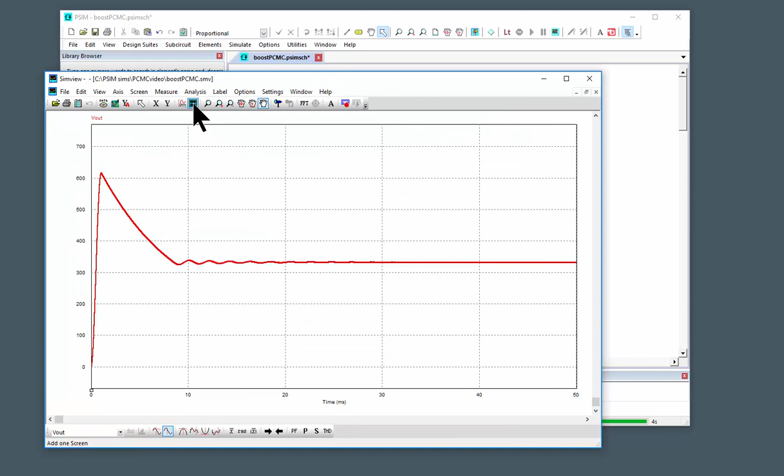We're going to go from 100 volts to about 300 volts over here, and we will basically run a simulation here in open loop to kind of figure out what we're dealing with. So the things that we're interested in looking at is making sure we're getting to around 300 volts here. I don't really care how precise this is at this moment. We'll implement a controller and that'll deal with that a little bit later on, as long as we're in the neighborhood. Look at the current through the inductor. Also, we'll pull up the current through the MOSFET. And those are the things that we are interested in.

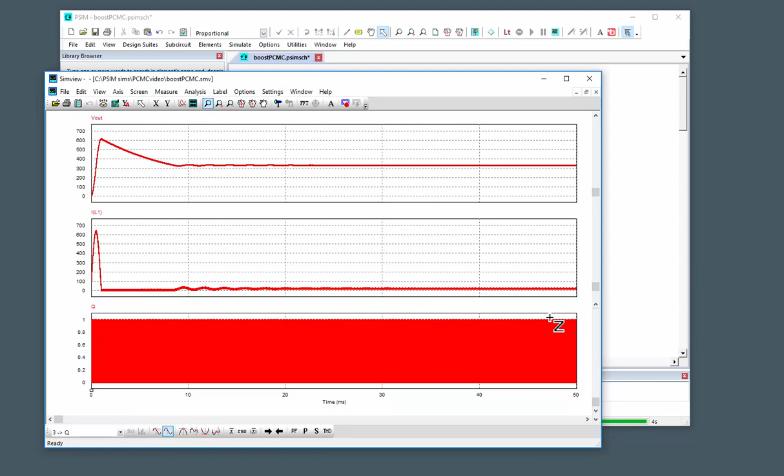Let's kind of zoom in over at steady state here, see what we've got. We just need a few cycles. Oh, this is just the switching. We need also the current through the MOSFET. Okay, so we're going to do peak current mode control. So we want to basically turn the switch off whenever we hit the peak current. We're going to be switching at 100 kilohertz, so the switching speed will remain the same. We can see we've got about 15 amps of ripple on the inductor here.

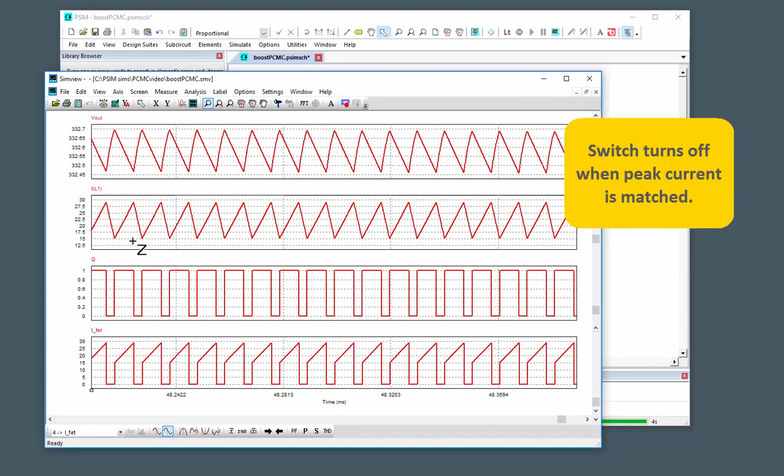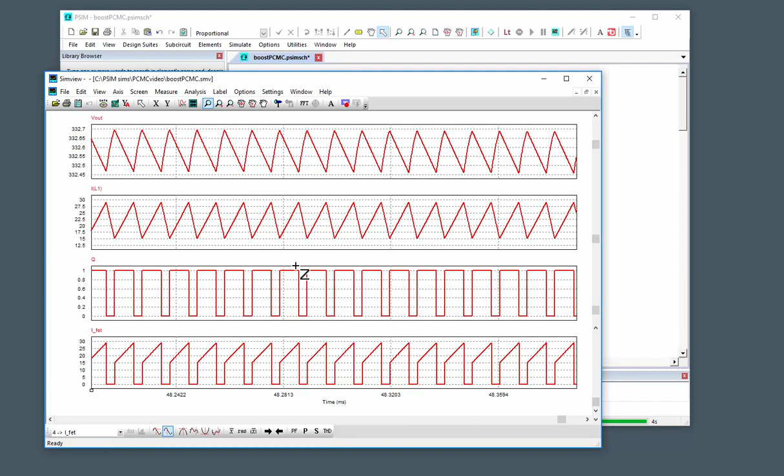We've got the current flowing through the MOSFET down here, and we can see that the inductor and MOSFET rising edges are the same. So what we're going to be doing is actually controlling the current and sensing the current on the MOSFET, and then using that for our control scheme. And then we'll do an outer voltage loop as well.

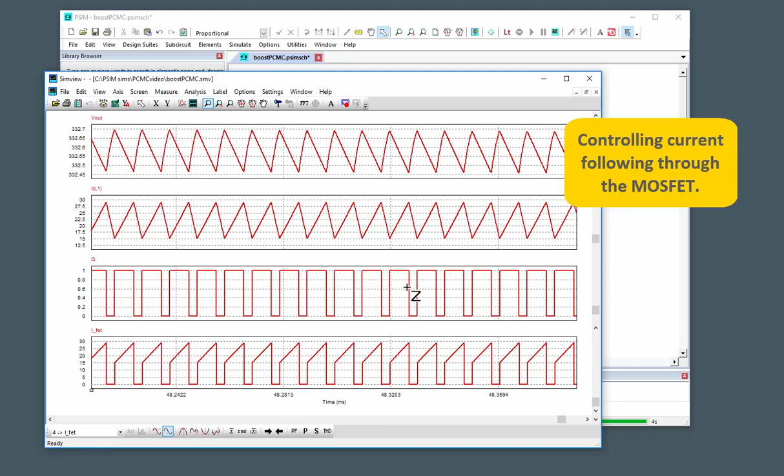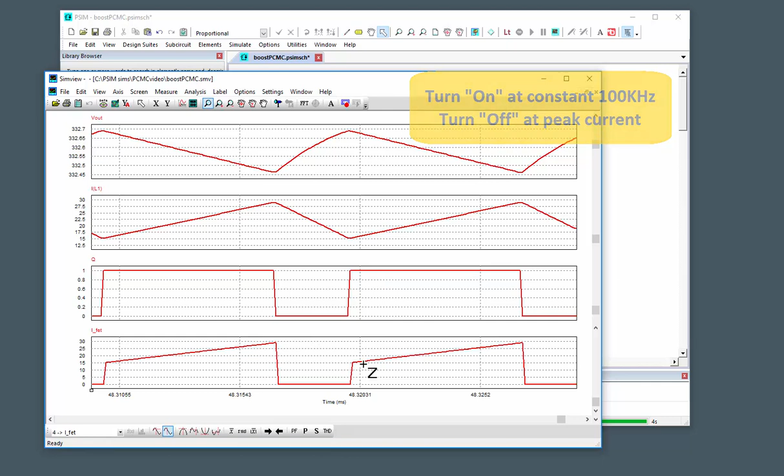So what we need to do is we need to turn the switch on and then turn it off. We'll just zoom on one cycle just to really hammer this point home. So we want to turn the switch on, and then we want to turn it off when we hit our peak current. Once we hit the peak current, we want to switch that thing off, and then basically switch back on again at the 100K point. So this off switching point will be variable. This on point will be constant. And then that'll kind of get us where we need to go. So first things first, let's set up that

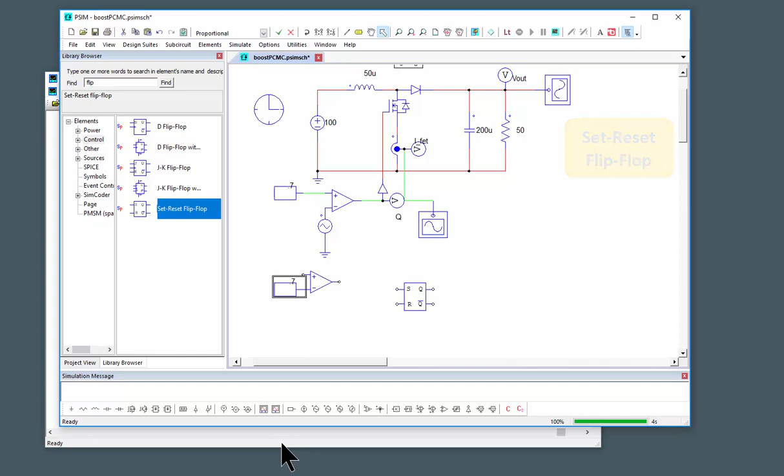peak current mode control. So to do that, we're going to need to grab a flip-flop. We'll grab the set reset flip-flop down here. We're going to grab a comparator. We're going to compare versus a reference. We're going to go to 30 amps here, so we'll change this to 30 amps. Previously, this was just driving a constant duty cycle of 70%. We need the current here, IFET. We'll pull this over.

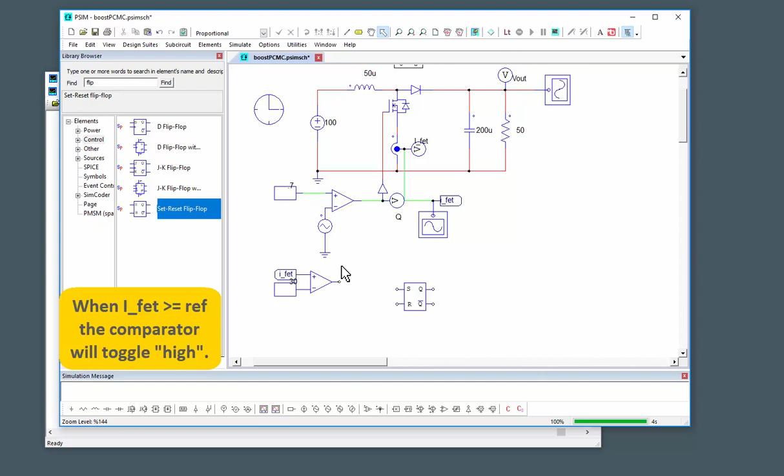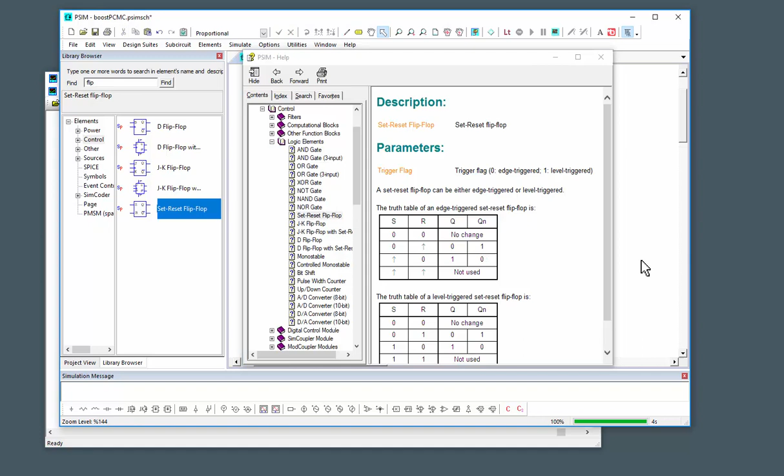Okay, so what this is going to do is once IFET is equal to or greater than the negative input, this will toggle high. So we'll look at help here. We'll go with edge triggered, so that's option 0. And so once it toggles high, we want it to switch off. So if we use this set option here as the input, if we toggle high, we want it to switch off, which means if we use the QN here, the negative output, we'll get the action we want. So we can reset it and toggle it high, and then we can set it and toggle it low. So let's set that up.

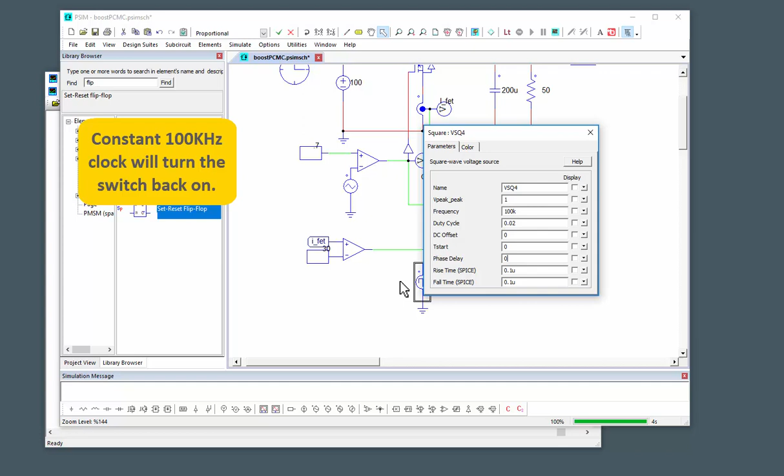Okay, so we're going to use the negative action here, wire that in, and we're going to set this, and then we're going to reset it at our 100K time period. We're going to go to 100K. We need to drive a relatively small duty cycle here because that'll drive our minimum possible duty cycle. And this is essentially everything we need to do here. Okay, so we've got our peak current mode control action set up here. So this will toggle the reset for us. And let's run this and see what happens.

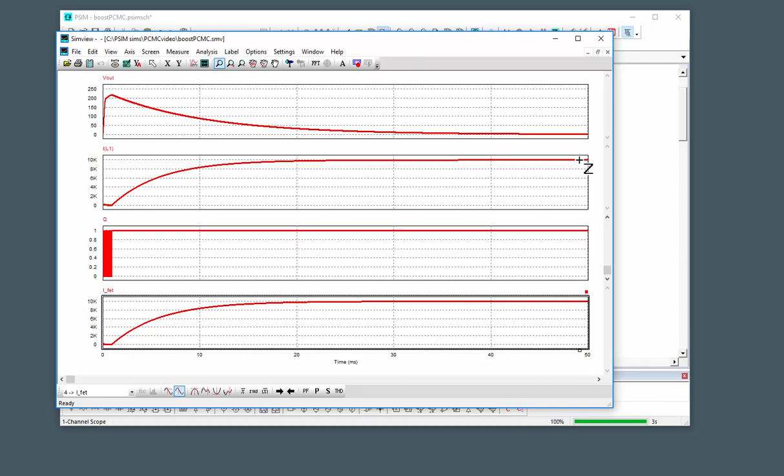And if you're familiar with peak current mode control, you might already know what's going to happen. And it looks like this isn't going to work. Our voltage has collapsed. Our current is a short circuit, so this is 10,000 amps. Nothing is working properly.

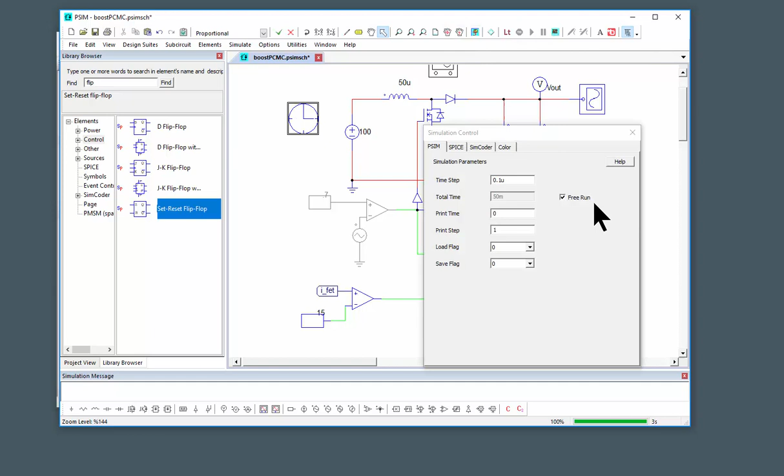So to kind of understand what's happening, let's put this into free run mode, and let's drop this peak reference down a little bit. Let me try and just move that here. We'll change this to 15, and we'll ramp up the peak reference, and then we can kind of look at what's happening. So this is going to be our free run mode, which is kind of like a test bench setup. So we can run this, and we can take a little peek here at the currents, and hopefully I can see the issue. Okay.

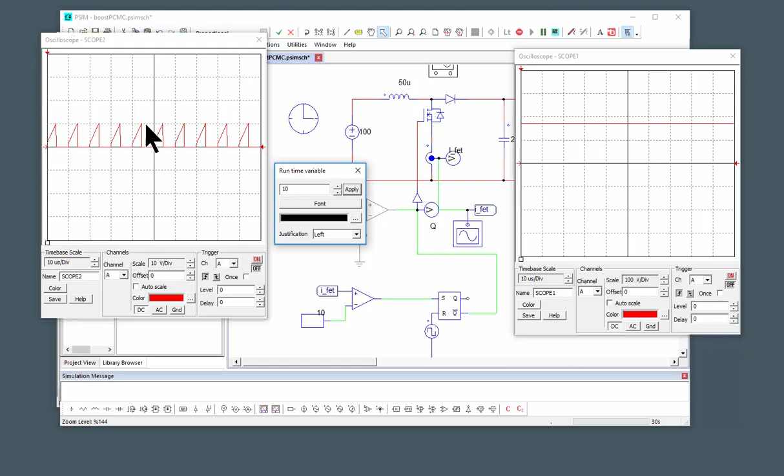So I've changed it to 10 amps here. Let's have a look at what the output voltage here is: just under 100 volts per division, so just under 200 volts. The peak reference is 10 amps. So this one is the current through the FET, and this one is the, let's just zoom in a little bit, and this one is the output voltage.

I'll AC couple this and auto scale it so that we can have a look at the ripple on the DC bus there. So what we're going to do is slowly increase the peak reference here. So there's 11 amps, 12 amps, 13 amps, 14 amps, and we can see, let me just put a trigger on here.

We're running into issues. So this is sub-harmonic oscillation. And this happens in peak current mode control when we start to get to duty cycles above 50%. And so that's why our converter didn't work right away when we set that peak reference up at 30, because we can't actually control it at that point. We need to modify the circuit to accomplish that.

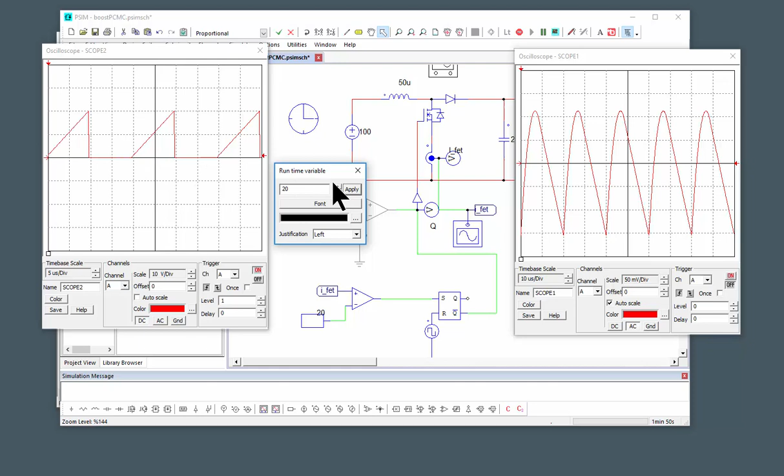So as we go up in reference here, we can see this short double pulse thing and this extra wiggle waggle, I'll call it, technical terms here, in the DC bus voltage. As we keep on going up, we can see that this merged over, and now we're switching at 50 kilohertz. If we keep going here, we'll just end up at a short circuit. So that's what happened. So let me just stop the simulation.

Now, what are we going to do? So the proposed solution, the known solution, is to actually add a bit of slope compensation to the reference here. I'm not going to get into the technical details of why. You can read up on that yourself. Okay, so we're going to introduce a slope into here, and that is going to be set up this way. So we're going to set up a sawtooth waveform.

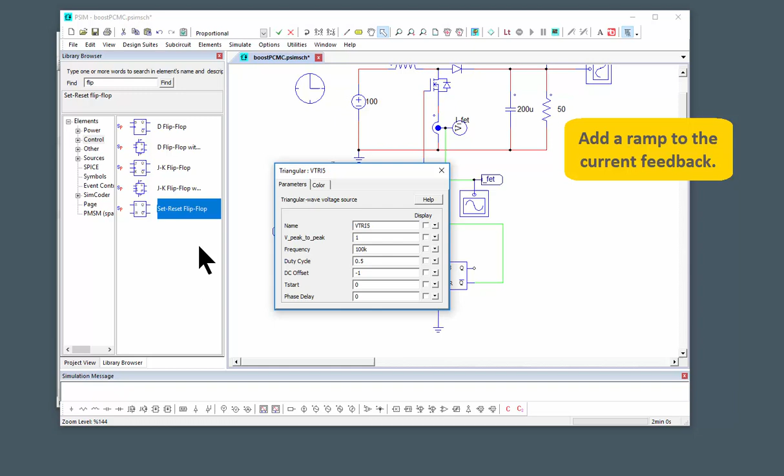And it's going to basically help stabilize the peak reference and let it return to its proper value at the end of each cycle. So this is going to be a sawtooth waveform. This amplitude, what is this going to be? That's the main question. We're adding a sawtooth at 100K. What should that amplitude be? Well, let's just disable this quickly. Okay, so we'll run this back in open loop with just a fixed duty cycle, and we'll have a little look at what we're dealing with here.

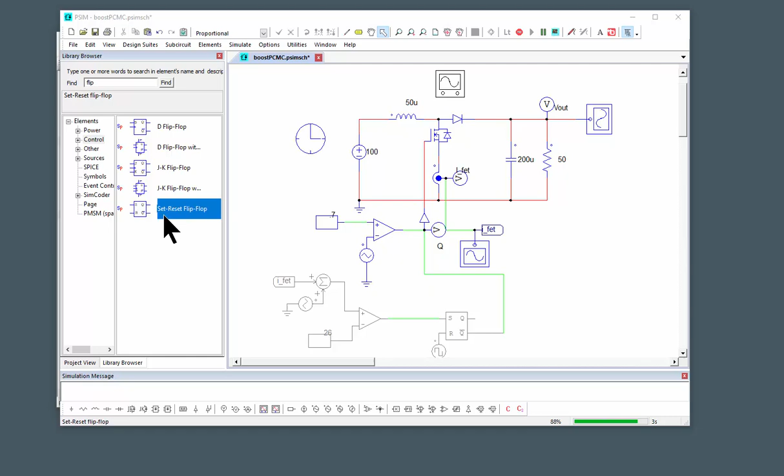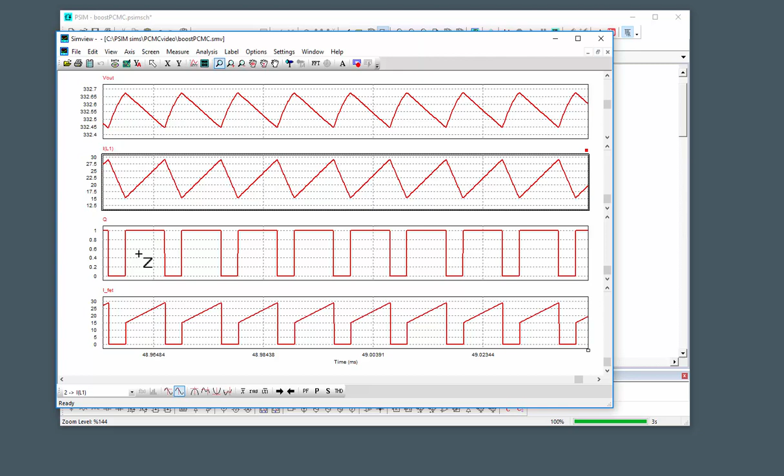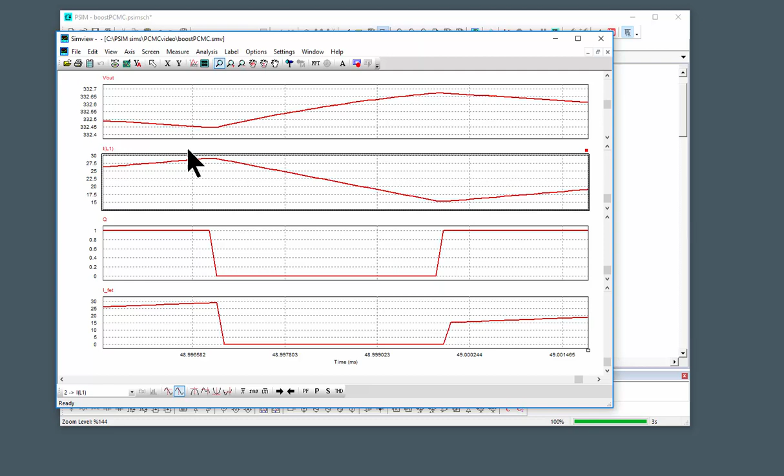Okay, so I'll go back out to steady state. So what we care about is the slopes of the current. And what we need to do, actually, is add in a slope that has the same slope as the downslope here on the current, on the inductor there. So we're going to add this in. And to do that, we'll just measure this. So we'll just grab just before and just after here, and I'll just move that right there.

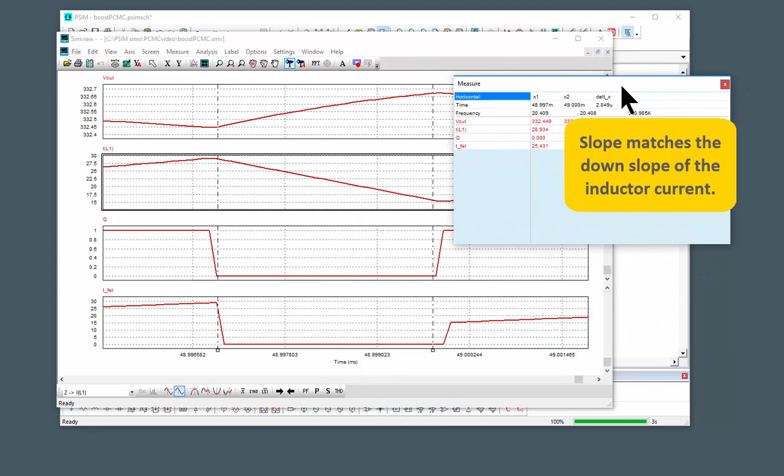Let me pull up the calculator. So we've got our cursors measuring the fall here, and we're going to look at the delta. So the delta on the current is 13.265, and the fall time is 2.849 micro. So that's the slope. And we're going to add that slope in over a 100 kilohertz period, and so that's going to be 10 microseconds.

So we'll add that in. And this is the number that we need to add in. It doesn't have to be a huge number of sig figs there, so 46.56 is going to be good enough. Come over here, and we're going to put that in. Oh, no, that was going to be 1. This is the wrong one. We want to put it over here.

There we go, 46.56. Let's disable this guy again, enable this, all these bits up, and hopefully we should be able to get to a peak reference that allows us to drive past that subharmonic oscillation and give us our 300 volts on the output here. So let's run it again.

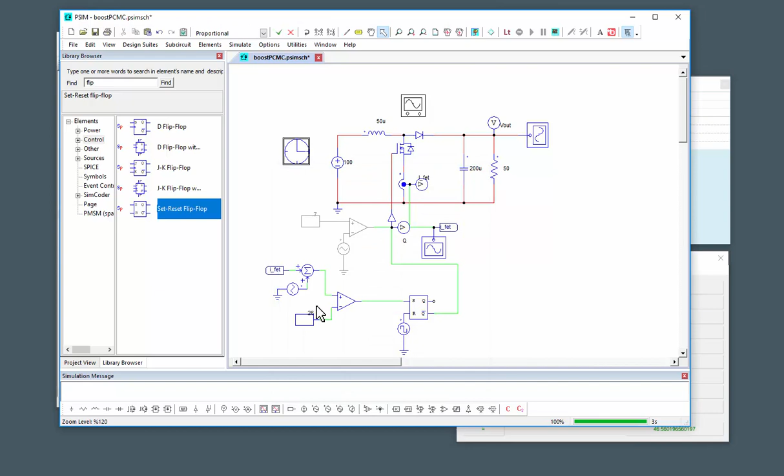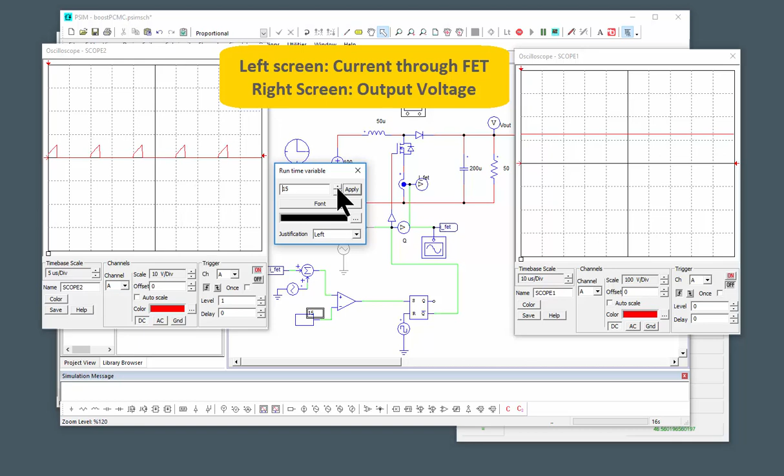So we were having issues previously, and we'll start from that lower value. I think it was 10 amps the first time. We'll run again here, pull up the current. So we're stable. Let's put this back onto DC. So we want to get to 300 volts on the output. So we'll just increase the reference here until we get to 300.

Okay, so we've got our 300 volts, and there's lots of headroom here with regards to current. We just need to be aware of what the limit is for our slope compensation that we've added. And so if we zoom back up again and wait for it to go into sub-harmonic oscillation again. Up. Let's see where it kicks out. It was right around here. There it was.

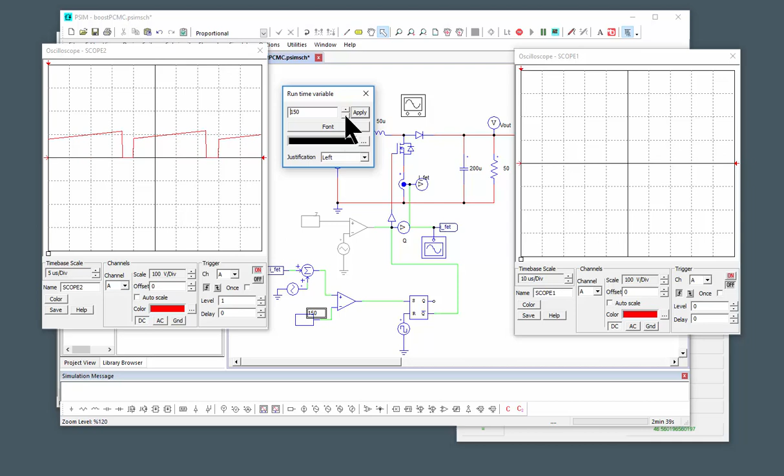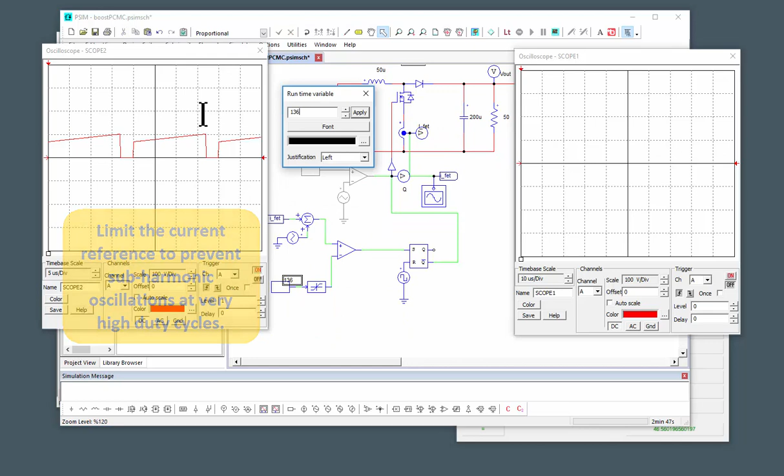Okay, it's stable there. So basically what might be a good idea is to put in a limit before we forget and say, okay, we're not going to go any higher than 130. Let's push this back to 50, 55. Let's rerun. Close these out, and we should be nice and stable now, and we are.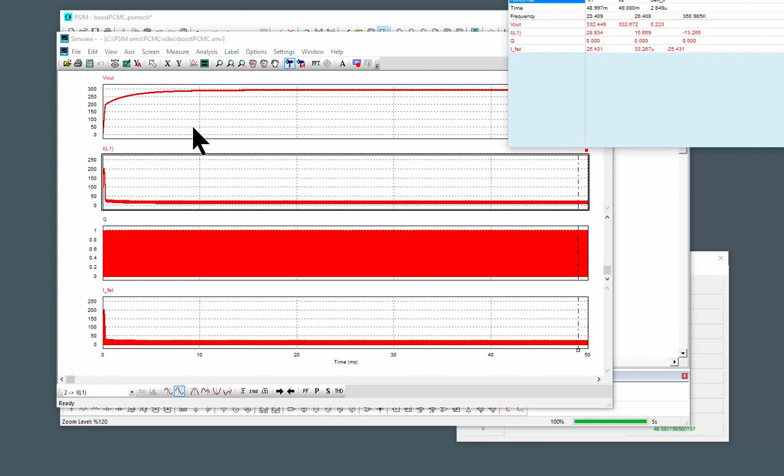Okay, so we got to 300 volts on the DC bus, and what we're going to do now is close the loop. The nice thing with PSIM now is we're going to be able to introduce a perturbation into the current reference and pick up the action over here on the DC bus voltage. So just to kind of give you a preview of what that will look like, we'll add this in.

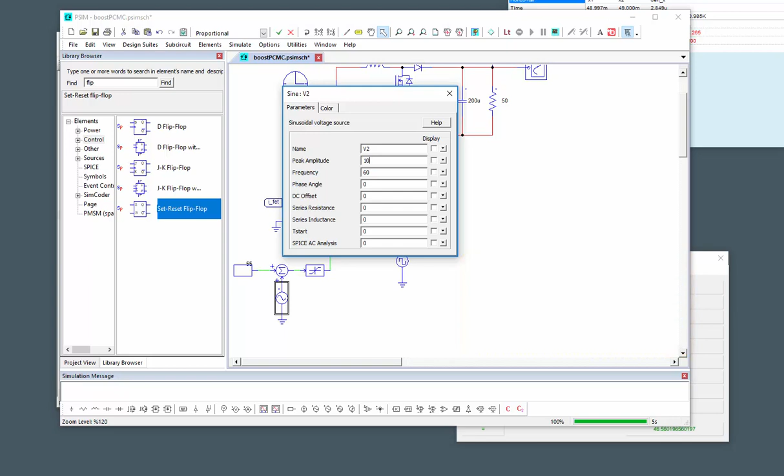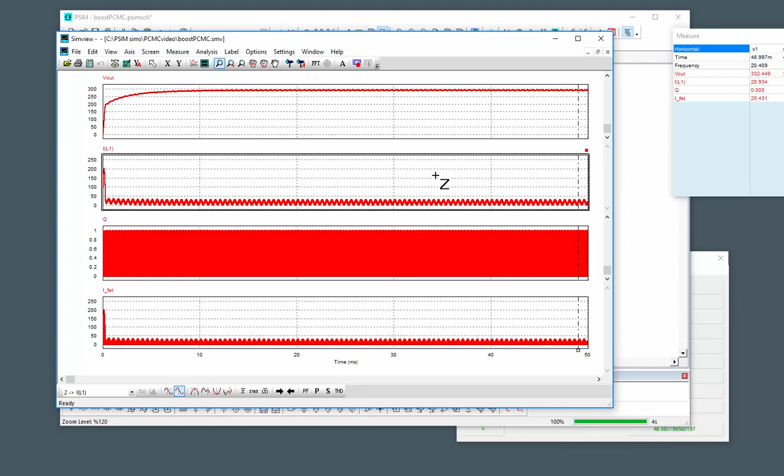So let's push a perturbation in here. Let's do 10. Do this at, say, 2K. And run this simulation again. You can see there's a little ripple there. You can see there's a ripple here on the current. Let's just quickly zoom in here. So you can see we've got, we'll scale this up.

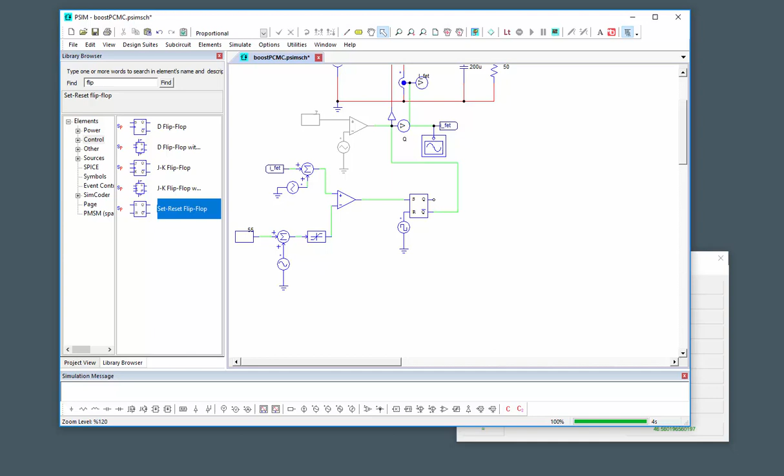So I've introduced a ripple at 2K. And if we look at what's happening, we can see that we've got peak to peak. So there's our 2K ripple. And what PSIM is going to do is a time domain simulation. It's going to inject those frequencies, and then we're going to do a phase and gain comparison at the DC bus voltage level. And then we're going to use that as our open loop transfer function, and we will close the loop. So we'll come back when I've got all that set up.

Okay, I've got the AC sweep set up down on the bottom here, and I've got our AC sweep probe set up over here. The settings I'm using, 20 milli for steady state time. So this was based on how long this converter needed to hit steady state. A source amplitude of 10. So when we look at the Bode plot, we'll see that there's quite a bit of attenuation and not all that much gain in the open loop system. So that's why we've got this set up here.

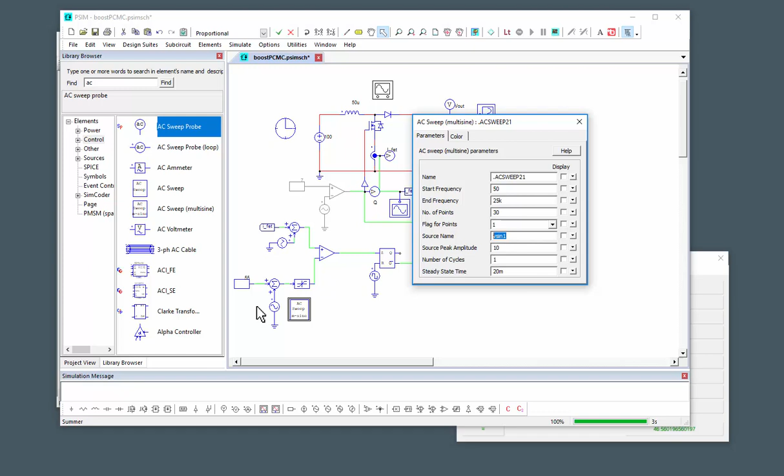Essentially, we need a little bit more signal in order to measure what's happening, and then I'm going from 50 to 25 kilohertz with 30 points. And we're VSin 1, so we're controlling this source right here. These numbers won't mean anything during the AC sweep. And so we're doing a comparison of a perturbation in the current reference versus the output voltage. So we'll run this and see what happens.

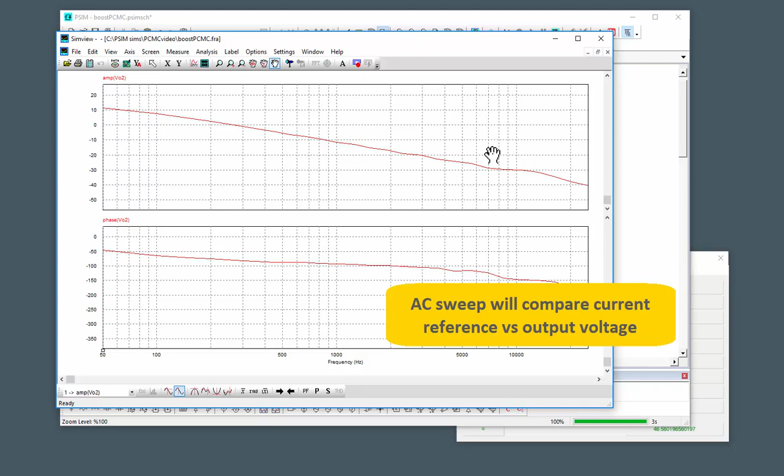So here's our Bode plot, and as I said, there's quite a bit of attenuation in the system, so that's why I ended up with a larger perturbation amplitude. And what we're going to do now is bring this into SmartCtrl.

Okay, so in SmartCtrl, I'm going to click Import a Frequency Response. We'll do Voltage Mode Control, hit OK. 100K, we're going to do 300 volts on the output. We'll grab that file, boost PCMC.FRA, hit open, hit OK. This other window pops up, sensor. I like to set my references to 1. So we'll go from 300 volts, and that'll be a reference of 1. So we need an attenuation of our voltage sensor of 3.33 milli.

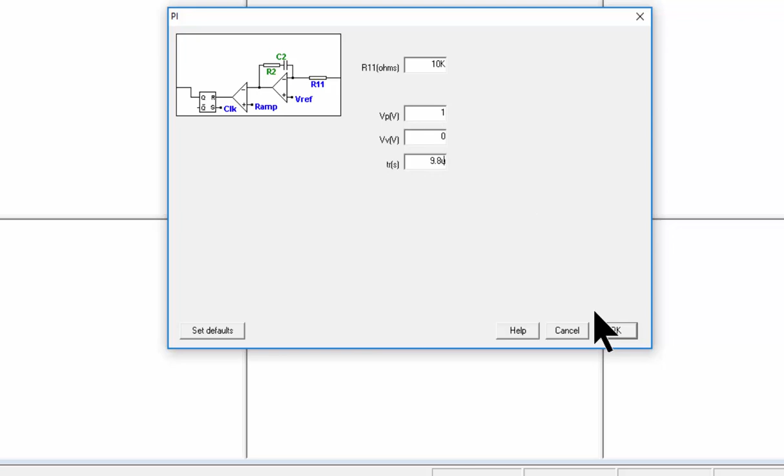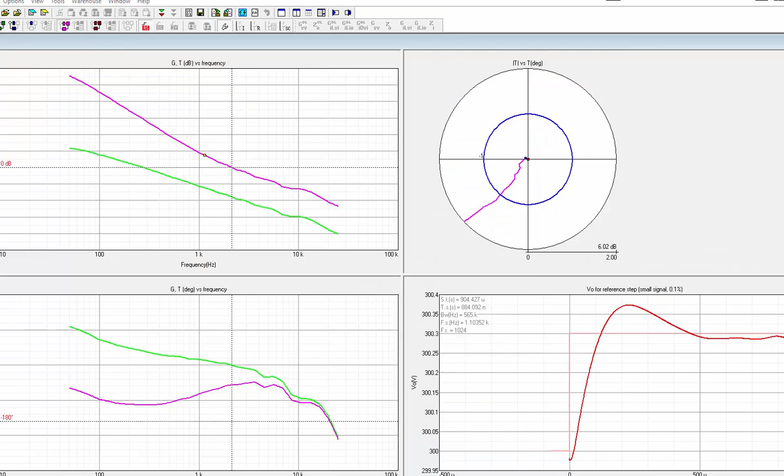And then a compensator, we'll just do a PI. We could do a type 2 if you were keen, but we'll just do this. So what I'm setting up here is basically a 0 to 100% reference. So everything's going to be per unit. This is defining a sawtooth waveform, just a simple ramp from 0 to 100%. If you start putting in different numbers here, you're going to start getting different gains into the system, which can be difficult to hunt down. And then we'll hit set. And then we'll just pick an operating point. And then we're off to the races.

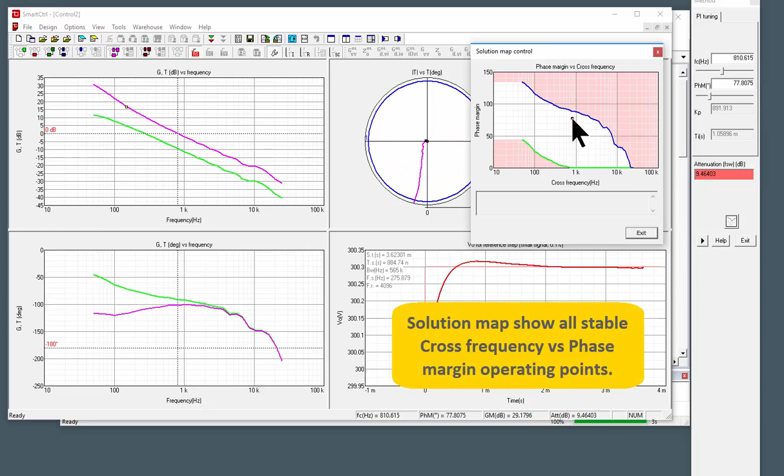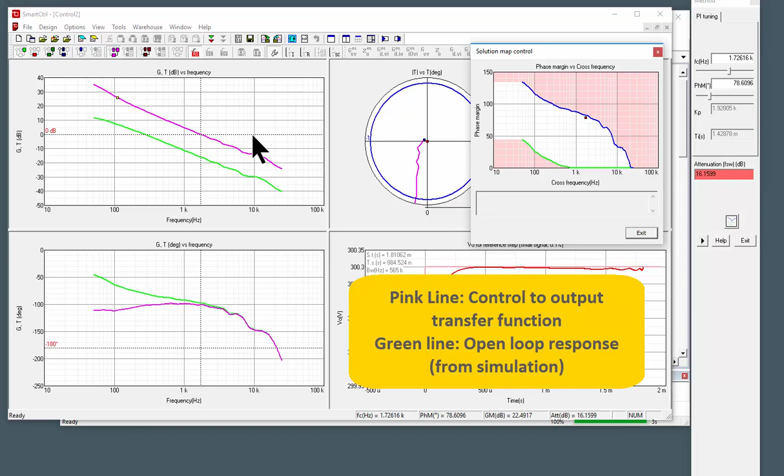Okay, so this is SmartCtrl. This little red dot is my operating point. So if I cruise this around in here, we can find a stable operating point. So say we don't want much overshoot. We can give ourselves a decent amount of phase margin. Cross frequency, say like 2K, something like that. Green line is the open loop transfer function. That's what we just generated from PSIM.

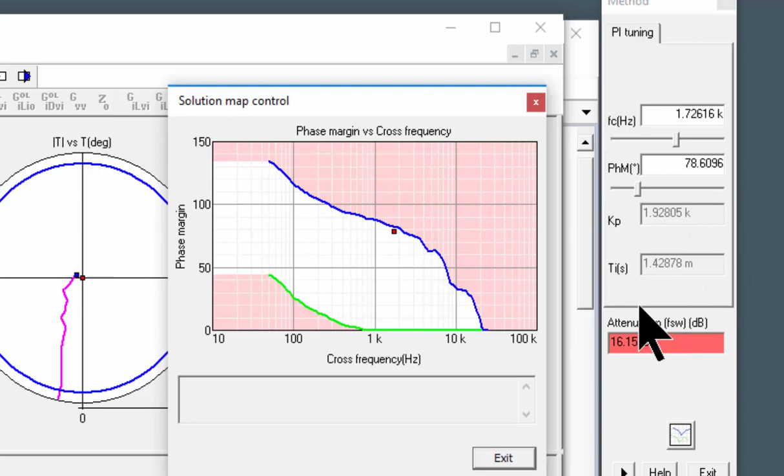The pink line is our loop gain transfer function. So this would give us our gain at DC, our cross frequency, and our phase margin. And this looks to be pretty good. So these are the numbers we're going to use here for our PI controller. These are the numbers we're going to bring over into PSIM.

Okay, so let's grab a PI controller. Let's grab a difference block. Let's grab IFET again. Oh, we need the output voltage this time, so we'll set up a sensor.

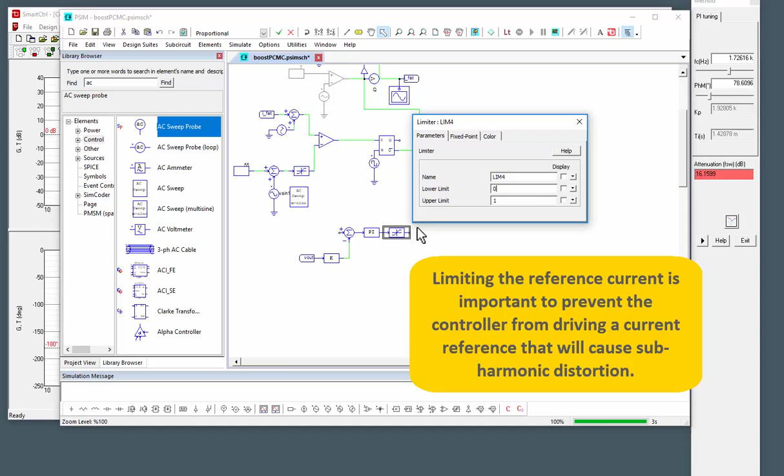Label that V out. Down here, don't forget our gain. So this is the sensor gain that we had, so 1 over 300. Wire this in. We should set up a limiter as well. So this is 130. 0 to 130. And a reference of 1.

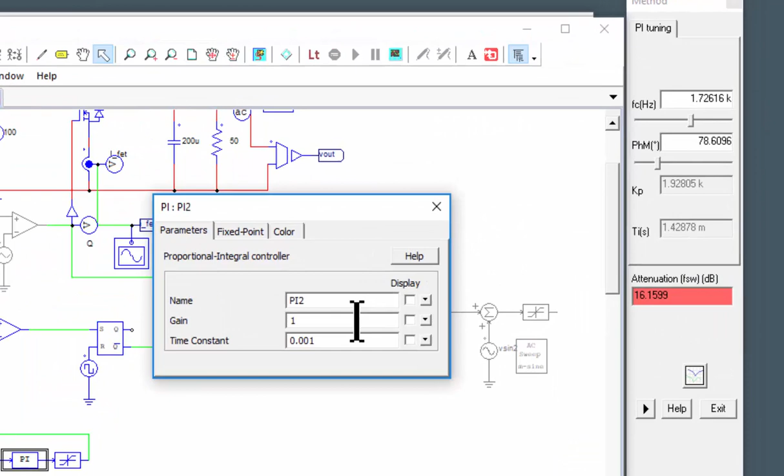Wire that in. And then, yeah, this needs to come over here. So we'll disable all this stuff. Actually, I'll just cut this out and put it over here. Move this, slide this up. 130, and these values are from here. So this is going to be 1.928K, and then the next one is 1.42878 milli. Hit OK, and we should hopefully be good to go, unless I've missed something.

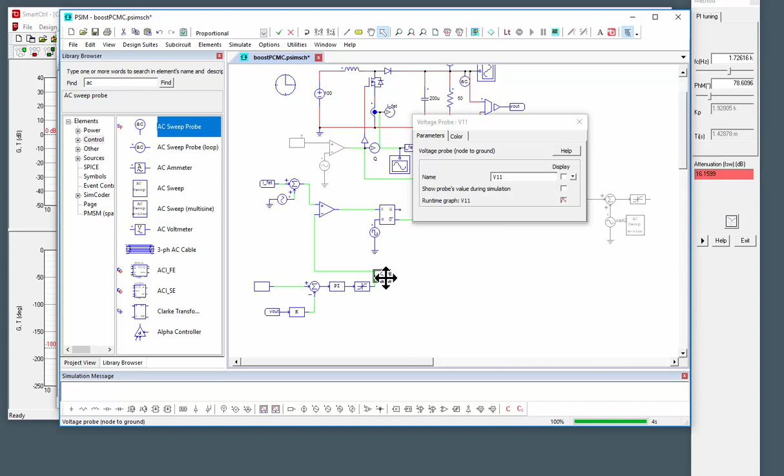No, there we go. Okay, let's run. Perfect. So yeah, we are at 300 volts. Everything's nice and stable. There's a decent amount of inrush here. We could add in a ramp if we wanted to, so that we could limit the amount of inrush current here.

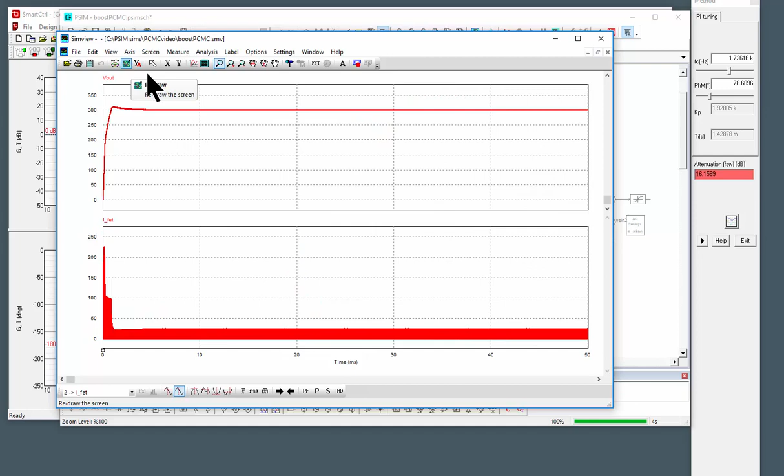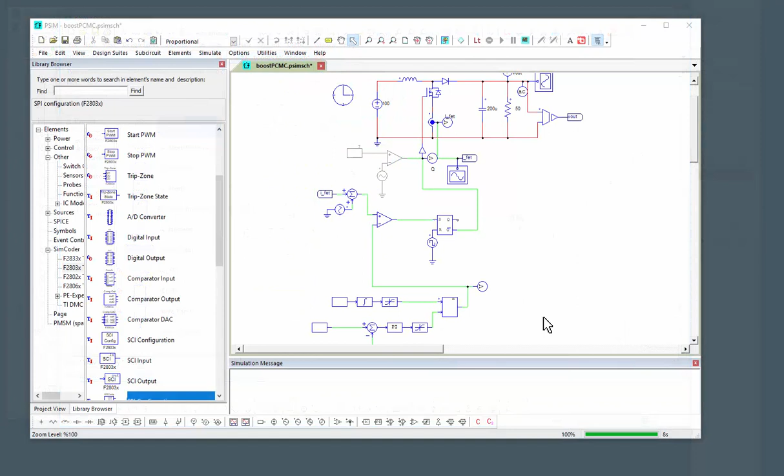Let's also take a little peek at this IREF during simulation as well. So let's have a little look at what happens here with the reference current during simulation. So this is the interesting bit of the simulation. And let's add IREF. Right, so we're limited at maximum, and then we see the control kick in. Yeah, so that's basically how we would set this up.

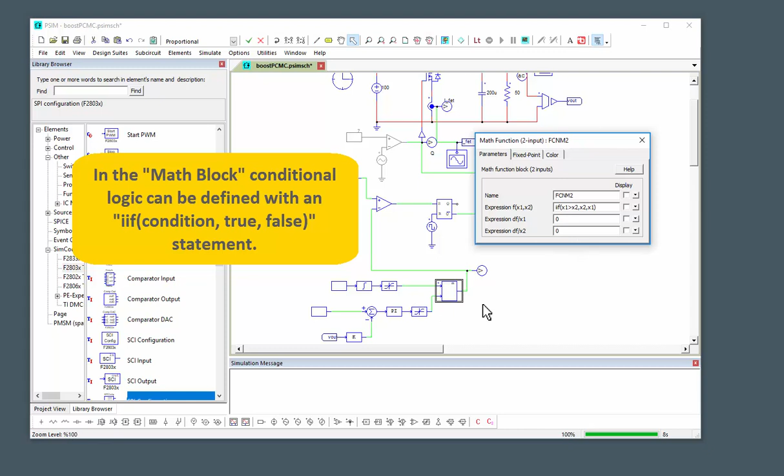So I'll set up a ramp limit now. It's relatively straightforward to do. Okay, so I've got my ramp set up here. How I do that is I just set up an integrator here, and I've got a limit set on that of 300. And then I've got a little math block here, and I've just got some conditional logic defined. So if x1, the top input, is greater than the second input x2, we should use x2. And then if not, we'll use x1.

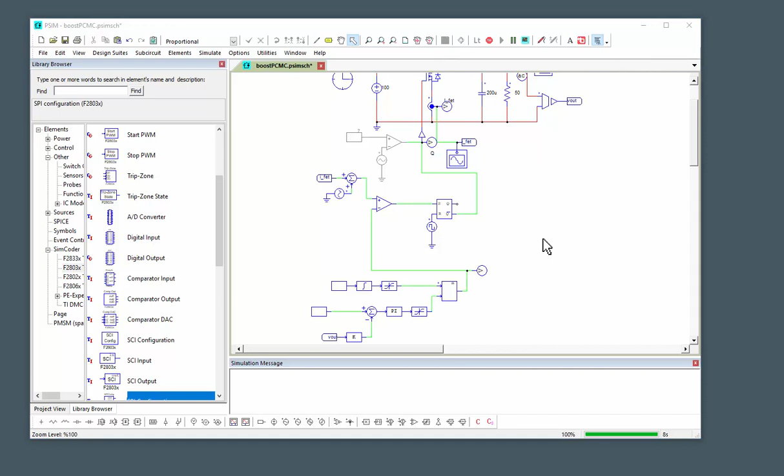So during startup, this x1 is going to be smaller than x2 because x2 will be up at the rail. And so what we'll do then is it'll use this ramp up until the ramp exceeds that of the controller, and then this ramp will end up at like 300, which is much, much greater than this. So it'll just continue to use the x2 input after the fact.

So we can run this now, and we'll see our little ramp, and then we've got our control kick in. We can stop that, that's probably long enough. So where's the output voltage? So a little bit of a different ramp up there, and then look at the current and IL1, and yeah, IRef, let's have a look at that. And so we can see that ramping up for reference current, and then we hit the maximum value there, and then we go back in.

So limiting this other inrush current here can't really be done by controlling the duty cycle. This is the inrush into the capacitor. We would have to change this some other way. So if we look at that, this is the current that we're actively switching. But this current, let's zoom in over here. So yeah, we're not really controlling this inrush current here into the cap.

But yeah, that's the end of this video. Then I'll do another video where I do a digital controller for the reference, since some of the Piccolo processors from Texas Instruments can handle a digital peak current mode control solution, which is interesting because the PWM is triggered by an analog comparator circuit. Obviously, with peak current mode control, we need to have this analog comparison to sense that peak current, but the reference can be supplied by a digital to analog converter from the MCU, and then also with the PCMC on those processors, you can add in a slope compensation, so you can set up some interesting triggering and all that kind of stuff.

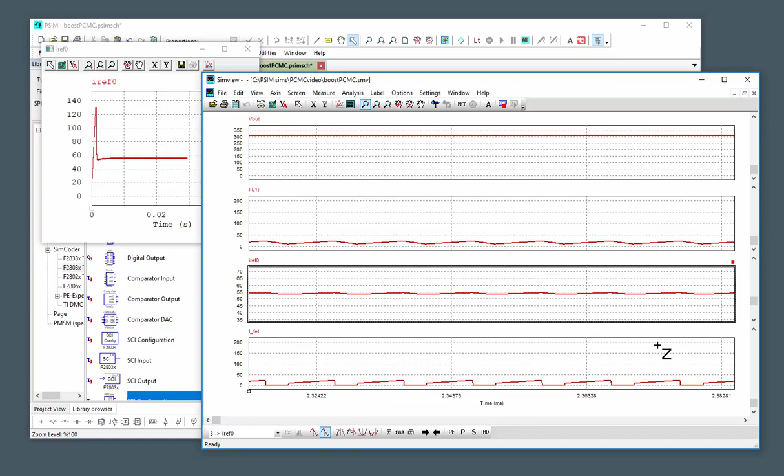Okay, so that was peak current mode control. We did an open loop. We figured out how much slope compensation we needed. We ended up coming up with, where are we here? We ended up coming up with what reference current we needed.

Yeah, everything's there. So check back again for more videos. And the next one I'll do a digital controller with this, and then I'm also going to try and do some videos soon for peak current mode control with other topologies like a buck converter, potentially a phase-shifted full bridge converter.